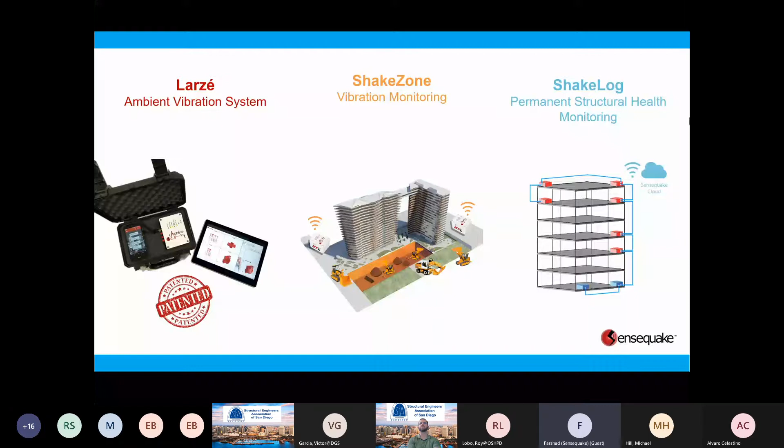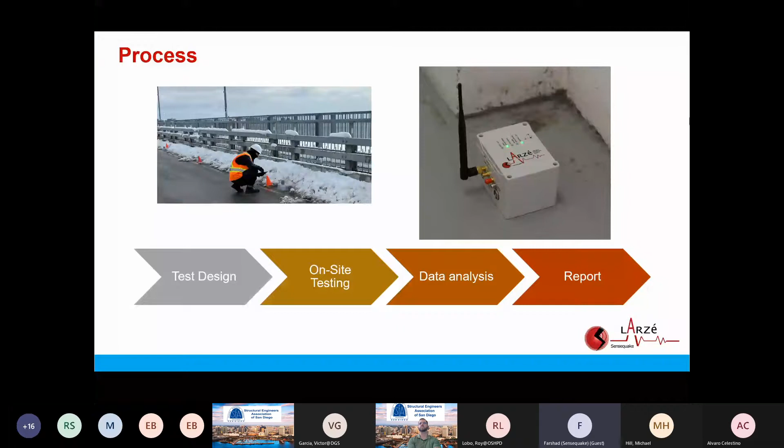We also have ShakeZone, which is a 24/7 web-based dashboard to monitor vibrations at construction zones. The first system, the Larzé system, the temporary sensing test, is very easy to use, measuring hundreds of locations in the operational condition of the structure, followed up with in-depth data analysis and comprehensive reports.

There are many different applications. I'm just showing here three of the applications we have with our temporary sensing system. The first one is getting the baseline of the structure: resonance frequencies, mode shapes, and damping ratios. With the correct type of analysis, you can remove the environmental impact from these parameters to be able to perform periodic monitoring of the structures.

You can detect the damage. You can also localize the damage based on these dynamic characteristics of the structure. For the first time, we have patented algorithms that allow us to use this one-time testing to predict the seismic performance of the structure. It is aligned with FEMA P58 fragility curves.

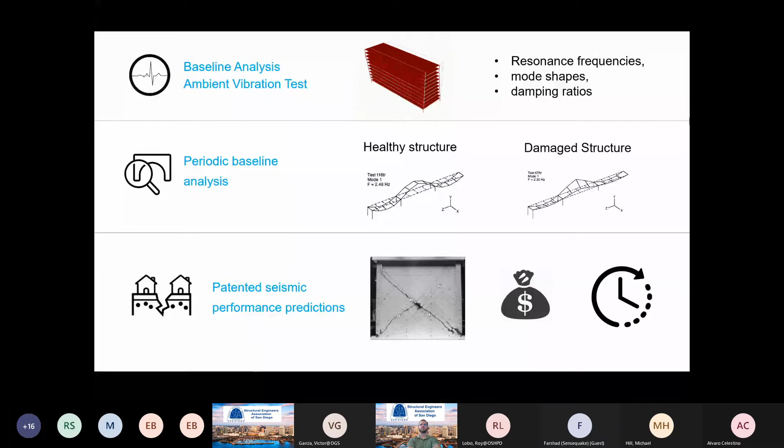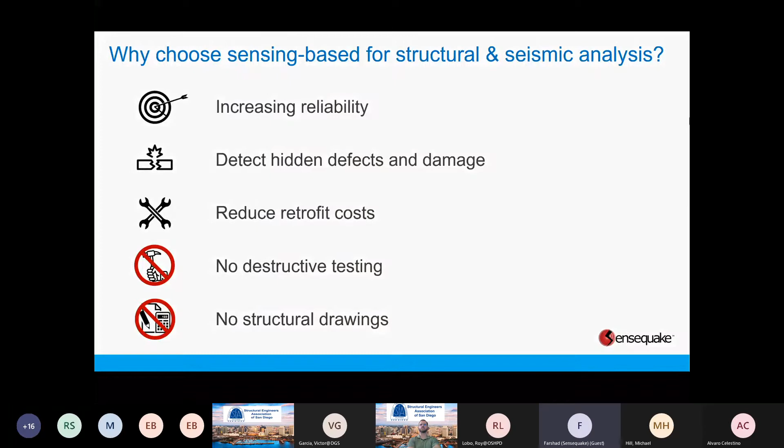Why do people choose Sensequake? We increase reliability, we detect hidden defects and damage points, we reduce retrofit costs, it's non-destructive testing, and we don't need any structural drawings. Our technologies have been used on landmark structures in Canada, US, and Mexico.

Now I want to talk about our ShakeLog. It's a permanent structural health monitoring system, a 24/7 real-time monitoring system. It detects earthquakes, but it also provides in-depth data analysis.

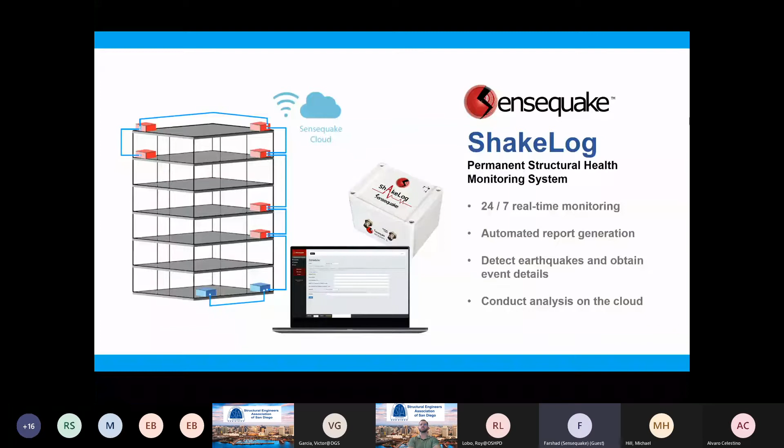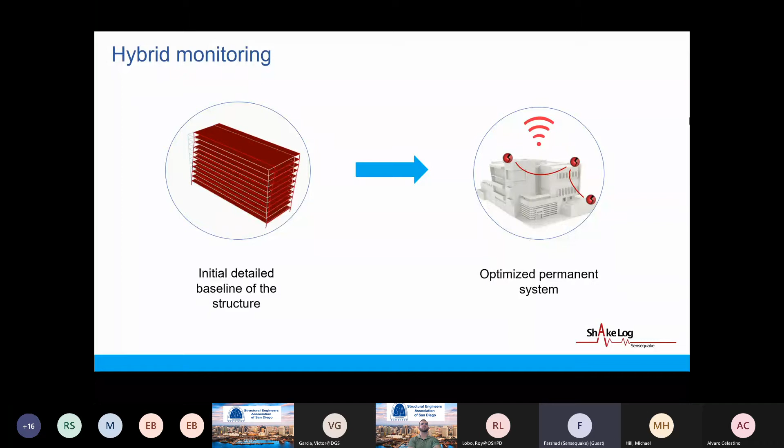We always tell asset owners, if you want a state-of-the-art permanent system, you need a detailed baselining with a temporary sensing system, measuring hundreds of locations that can be used for in-depth data analysis. Then we can identify the best locations to put a few permanent sensors in a structure. The two systems are complementary, and that leads to a state-of-the-art health monitoring system.

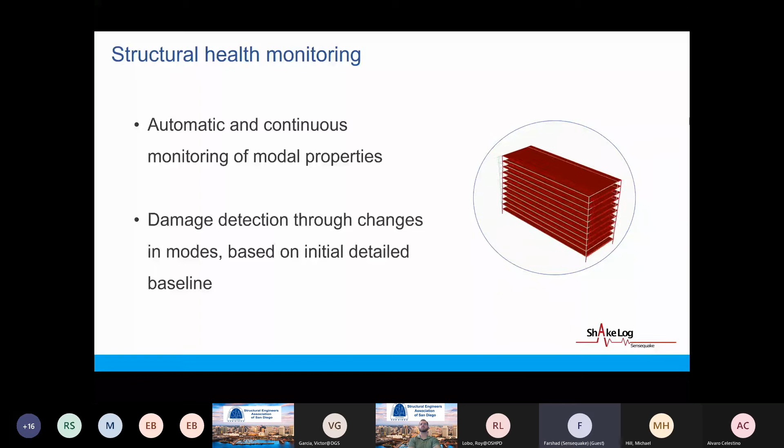Our permanent system is capable of continuous monitoring of the dynamic characteristics of the structure. We can detect damage based on our hybrid system, a combination of periodic monitoring, detailed baselining, and our permanent dashboards. Here are a few images of our web-based dashboards. You can monitor all these frequencies and mode shapes continuously with our dashboard.

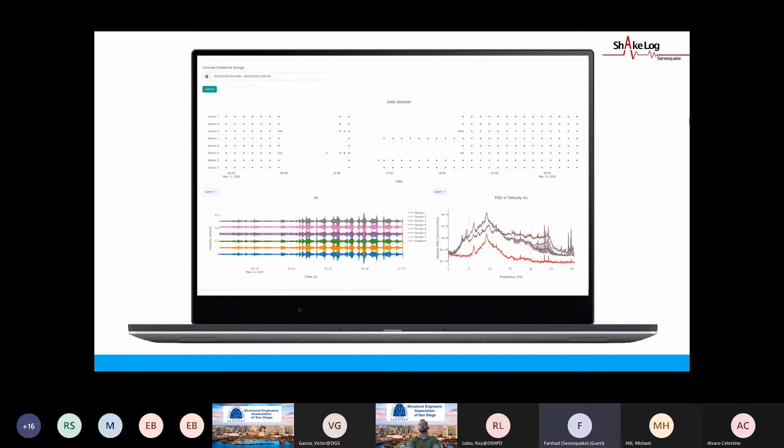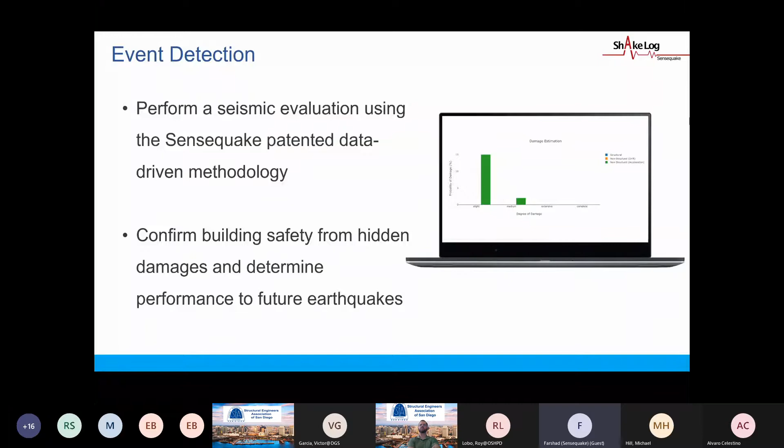And then we capture seismic events. We can send alarms to the owners, to the engineers, and so on. Also, what differentiates the SenseQuake platform is that we can perform in-depth seismic evaluation of structures just based on the sensing tests with our patented algorithms. No need for visual inspections.

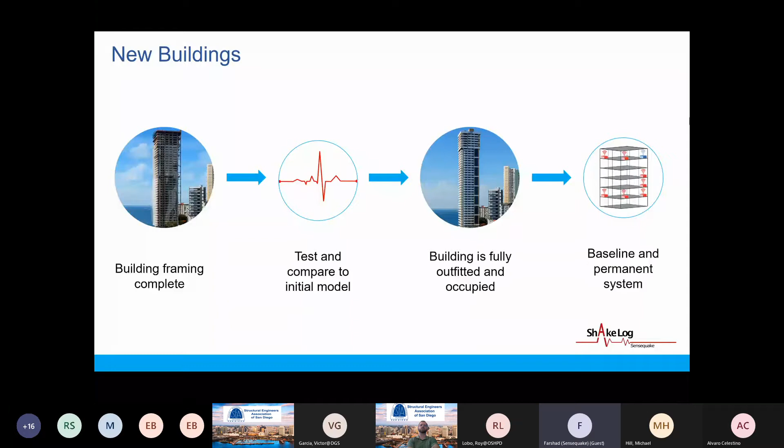If you have a new construction, you can also test the construction during this phase, comparing construction with the design and concepts to see if there is any change or differentiation before the building is fully outfitted. You can then adjust your design and construction.

In summary, we don't use any finite element model. We don't use any drawings. We are capable of capturing the baseline of the structure, which is very important information to detect damage. We can continuously monitor modal properties. For the first time, it's possible to perform seismic evaluation just based on this simple temporary testing or our permanent web-based dashboard.

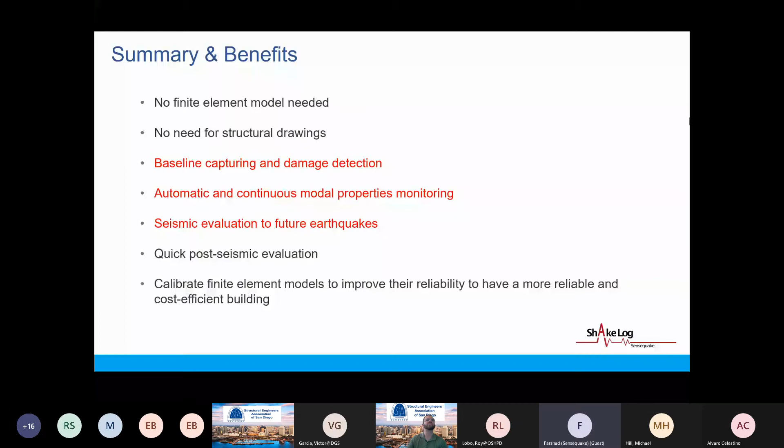Many structural engineering firms in North America are using SenseQuake technologies. We also offer services to asset owners and engineers in North America. We have a very interesting partnership model for local engineering firms that are not familiar with these technologies but are looking to expand their service offerings in their local markets. If you're interested, please let us know. We can discuss the details afterwards. Thank you.

Thank you, Farshad, for the presentation. Your guys' company seems pretty amazing, what you guys are able to do with just some sensing equipment. So I'm very interested in seeing what you guys are capable of doing.

So with that, I'm going to introduce our speakers in our presentation today. Our presentation is about the seismic instrumentation programs that both OSHPD and the City of San Diego are doing in response to recent code changes.

Our first presenter today is Dr. Roy Lobo, principal structural engineer with OSHPD, who has been with OSHPD for over 17 years. Dr. Lobo received his doctoral degree in structural engineering from the University of Buffalo in New York in 1994. Prior to working at OSHPD, he worked with several reputed firms in the LA area. He's an active member of the structural engineering community with memberships in the Structural Engineers Association of Central California and the American Society of Civil Engineers. He was chair of the SEAOSD Seismology and Existing Building Committees, and chair of the same committees for Central California, and he's currently a member of the SEAOSD Board of Directors. He's a voting member of ASCE 7-22 and ASCE 41-23 committees and chair of the ASCE 41-23 Foundation Subcommittee. His expertise is in nonlinear analysis, and he's the prime author of a computer program, IDARC 3D. In addition to his analytical background in computer modeling and software development, he has vast design experience in the evaluation and retrofitting of existing buildings. He's currently in charge of the OSHPD Structural Services Unit, responsible for promulgating all necessary structural amendments to the California Building Standards Code to align with the mandates of the California Seismic Safety Act for hospital facilities.

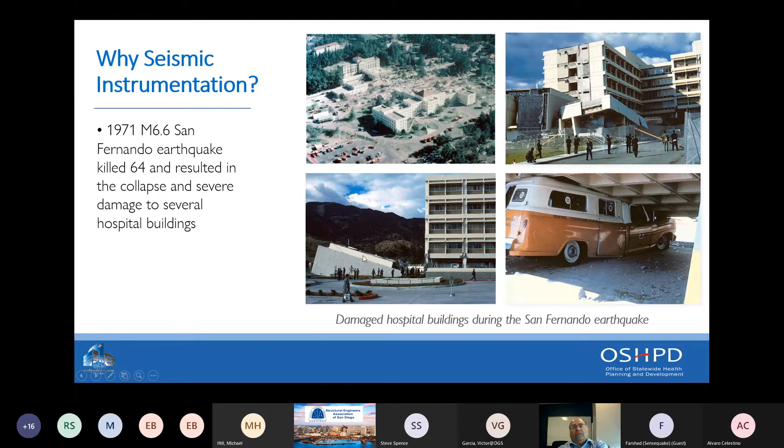Thank you, Steve. So why do we have a seismic instrumentation program? This program was started because of the damage from the San Fernando earthquake. As you can see here, the devastation caused to hospital buildings was significant. Everybody knows the Olive View Hospital, the Veterans Hospital, you can see the stair tower collapsed.

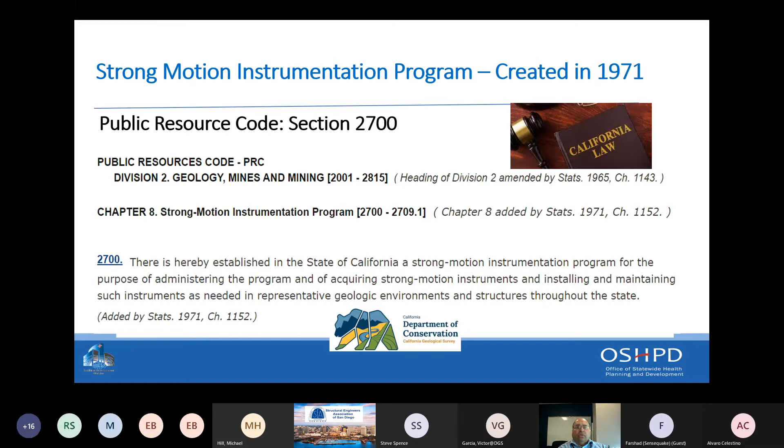This was what sparked the bad performance of hospital buildings and other buildings, sparking the initiation of the California Strong Motion Instrumentation Program, which was enacted into law in 1971. It created the strong motion instrumentation program such that seismic staff would install and maintain equipment in representative geological environments throughout the state for different types of structures. The code section is given there, you can look it up — the San Fernando earthquake was the initiation of the strong motion instrumentation program.

So whatever program you have, somebody has to pay for it. Who is paying for this seismic instrumentation program? It's basically coming out of our permit fees.

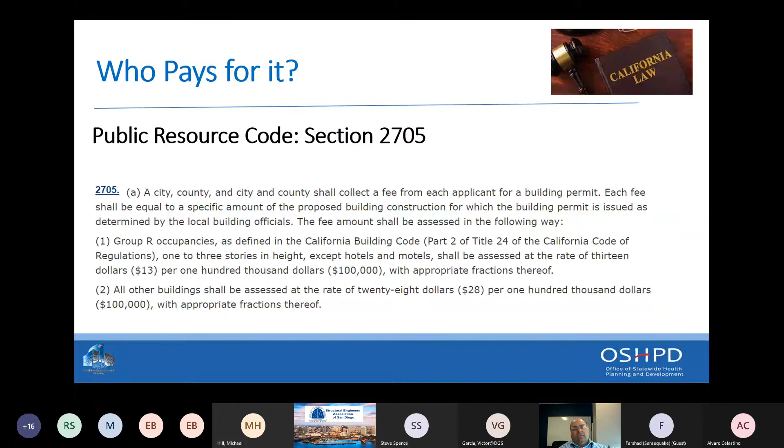Depending on the cost of your building, there's a permit fee per $100,000, a flat fee that goes toward payment of this seismic instrumentation program. For residential buildings it's one price; for other buildings it's a higher price.

However, some buildings are not covered by these permit fees, and there are exemptions. The strong motion instrumentation program will not instrument certain types of buildings unless there are matching funds, with exceptions for hospitals, dams, bridges, and some schools. Since I work for OSHPD, the building department for hospitals, that's what I'm going to talk about today, along with our instrumentation program.

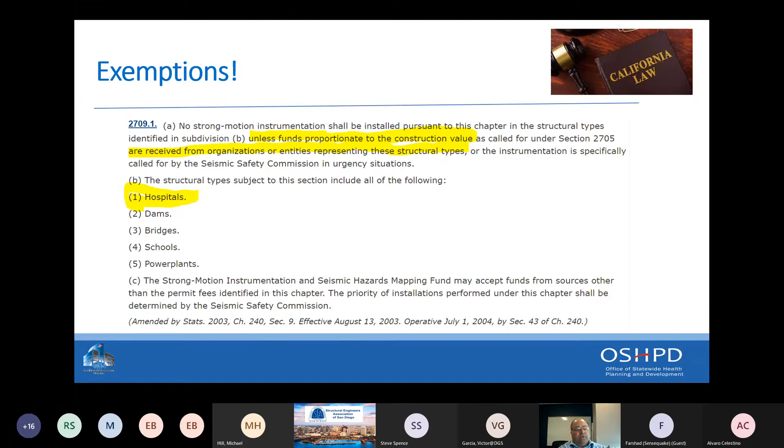The seismic vulnerability of hospitals is well known. I showed you the earlier slide, and this is what led the legislator to respond to the failure of buildings that did not perform well, back in 1971. The 1973 codes changed to add seismic detailing aspects for buildings so they could sustain strong motions like we experienced in the 1971 Sylmar earthquake.

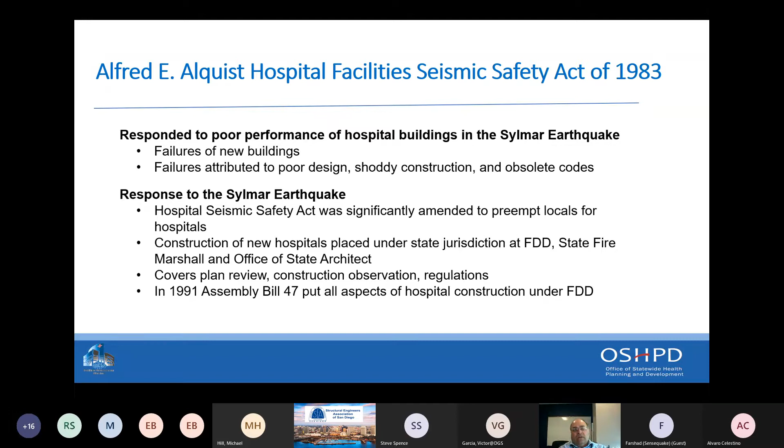That was the response of the legislator, which created the Seismic Safety Act of 1983, making sure new hospital buildings are under the jurisdiction of OSHPD, placed under state jurisdiction at FDD, the Facilities Development Division. In 1991, Assembly Bill 47 put all aspects of hospital building construction under FDD's jurisdiction.

So what is our mission? Our mission is to safeguard public health, safety, and general welfare through regulation of the design and construction of healthcare facilities to ensure they are capable of providing sustained services to the public, since hospitals house patients who have less capacity than healthy individuals to protect themselves, and must be reasonably capable of providing services after a disaster.

That is our mission, and this is our goal, given in statute. This was the first-ever definition of functionality. You may have heard of the new proposed legislation we're trying to push through the legislation committee for SEAOSD on functional recovery.

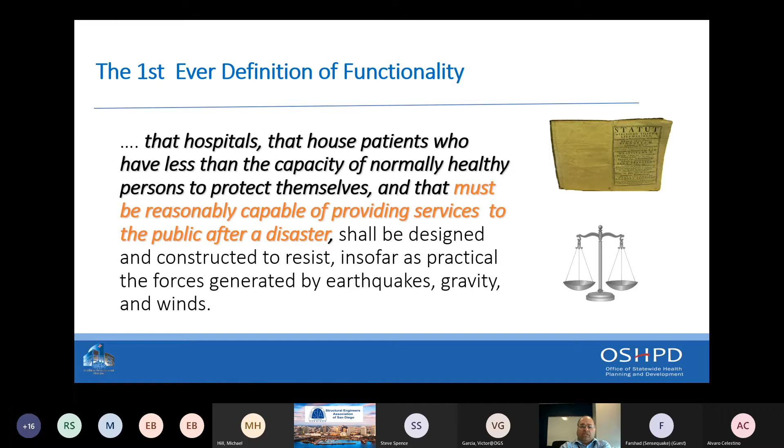OSHPD was already a forerunner on that, and this is our mandate given right back in the 1983 Hospital Seismic Safety Act. The legislator, in the hospital seismic safety code, also gives OSHPD the authority to perform subsequent post-earthquake studies.

Subsequent to the occurrence of any earthquake, the office may make or cause to be made studies of healthcare facilities within the involved area. So if an earthquake happens and affects a hospital building, OSHPD staff is immediately deployed to those hospitals to assess the safety of those buildings for continued operation.

It's similar to your Safety Assessment Program — we do that for hospitals. We red tag, yellow tag, or green tag hospitals after an event. This is the authority that gives us permission to go ahead and do that.

Also given in law is the ability to research ways to reduce seismic risk. It is further the intent of the legislator that the office, with advice of the Hospital Building Safety Board, may conduct or enter into contracts for research regarding the reduction or elimination of seismic or other safety hazards in hospital buildings, or research on hospital building standards. So we also have a legal requirement to conduct research to reduce seismic risk.

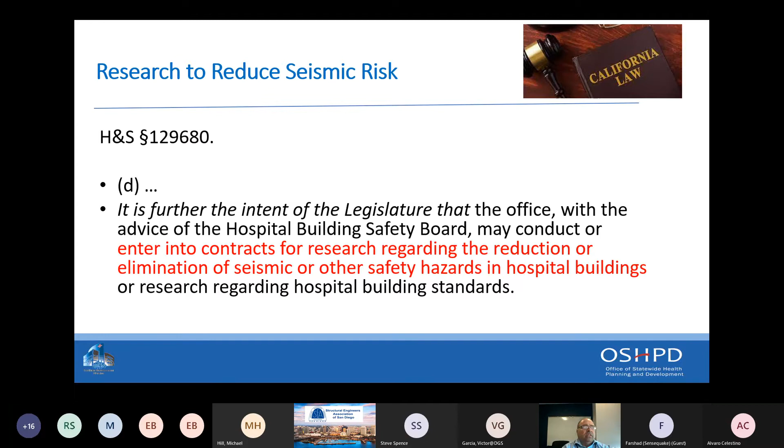Those are the legislative requirements giving us authority to do what we're doing regarding seismic instrumentation. So how well did the Act of 1983 perform? The test came with the 1994 Northridge earthquake — everybody knows that. I happened to be in Southern California at the time, and it was scary. A lot of code changes occurred because of the damages and failures from Northridge.

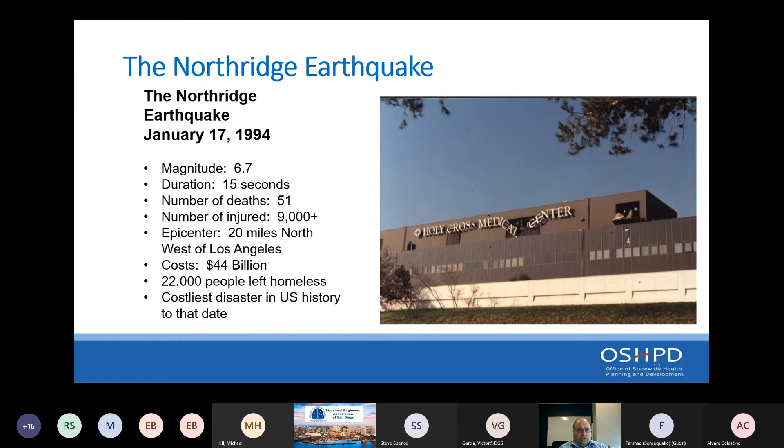So how did hospital buildings perform? We have the 1983 Hospital Seismic Safety Act, and based on that, all new hospital buildings were now under OSHPD. So how did those particular buildings perform? Here's the report card.

At 23 hospital sites, they investigated how the buildings performed in terms of seismic response to the earthquake. There were pre-act buildings, built before 1973, and post-act buildings, built after 1973. This is about the 1994 earthquake.

They looked at how the building performed in terms of the structure, and how the non-structural components performed. There were 12 pre-act buildings that were red tagged, and zero post-act buildings. That looks pretty good.

For yellow tag, there were 17 pre-act buildings, but only 1 post-act building yellow tagged. Yellow tag means only a small portion of the building could not be used after an earthquake. Then 30 post-act buildings were all green tagged. These are for the 23 hospital sites looked at that time.

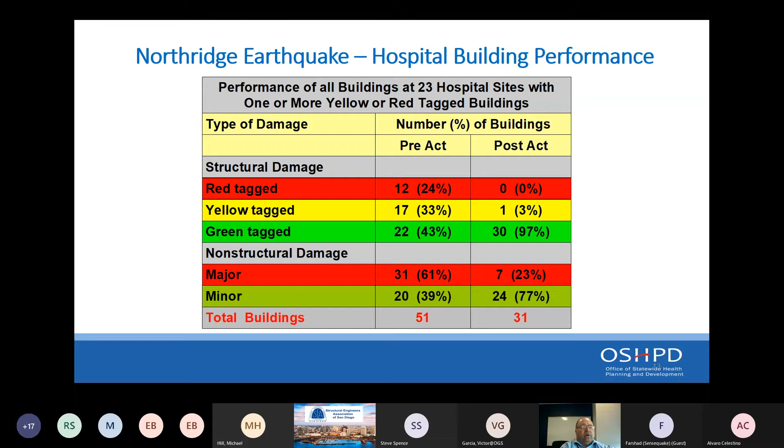But regarding non-structural damage, even the new post-act buildings for the most part did pretty good. Minor damage was high, but major damage was not as high. It showed that whatever they were doing in terms of transferring authority from locals to OSHPD, and looking at hospitals differently so they can continue to provide services to the public after an event, was kind of working.

So how do we evaluate building performance to reduce seismic risk? There are different ways you can do that. You can have shake table testing, using an e-defense building, I think that's in Japan, where you put a building on a shake table.

I was in Buffalo, I studied there for a while. We had buildings put on shake tables, and you shake it, see the results, then you can retrofit it and shake it again. A lot of studies can be done, but that's kind of expensive, right? And you cannot get the size and everything of a real building put on a shake table test, so it has some limitations.

The other way you can check building performance is through analysis and mathematical modeling. And then there's real-world laboratories, which is basically instrumentation of buildings, and then you wait for the earthquake and see how that building performed based on your analysis. Then researchers try to figure out what was the damage and whether they can predict the response.

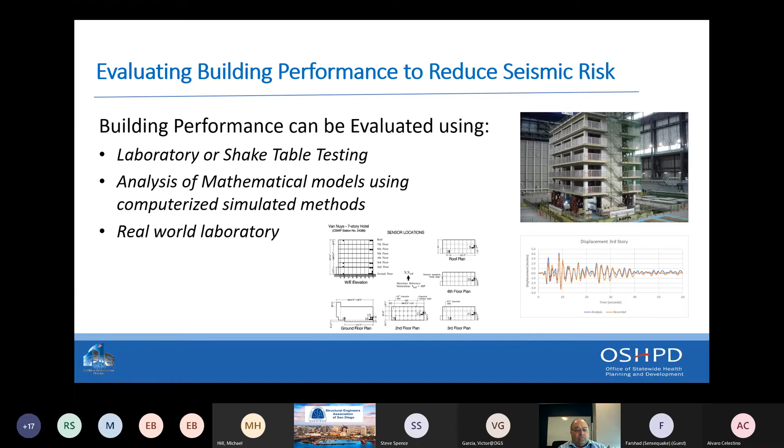So the real world laboratory is where we are today. Recordings from instrumentation are critical to understanding building performance leading to design of safer hospitals. You can do all the lab work or the analysis, but the proof of your efforts is how it actually performs in reality.

In terms of how you locate the sensors, OSHPD works with CSMIP, because as I said, the instrumentation program was created, and CSMIP was created to make sure they maintain these instruments. We also need to provide funding for these particular hospital buildings because they are not part of their mandate. They are still supposed to be in charge of it, but the funding source is different, and I'm going to talk about that a little bit.

So here's where it comes in handy in terms of why we are instrumenting certain types of hospital buildings, because we want to learn more, reduce seismic risk, and understand the performance of the buildings. You can do as much analysis as you want, but until you actually do a full test, you really don't know how it is going to perform, and that's one method to do it.

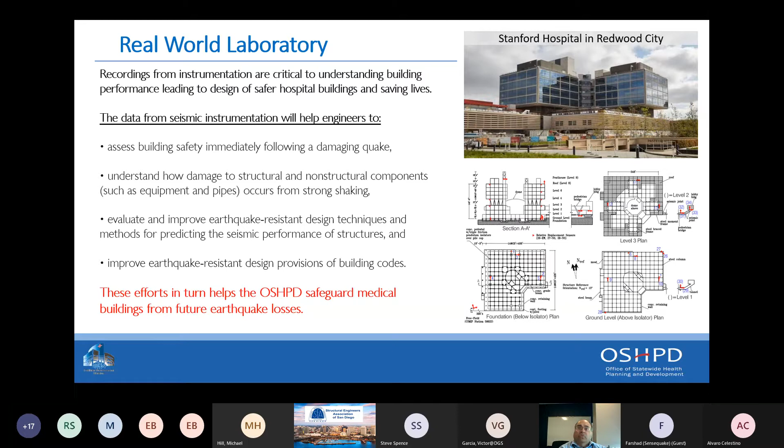The goal is to make sure more hospital and other buildings get instrumented over time. Through these efforts, it will help OSHPD safeguard medical buildings from future earthquake loss. Understanding and reducing seismic risk, because we understand better how these buildings perform, will help us design buildings better for functionality post-earthquake events.

There are two types of buildings instrumented with funding from OSHPD. Even though we may not be paying for it, there are two types under our purview: owner-paid instrumentation and OSHPD-paid instrumentation. Owner-paid instrumentation is when the building code dictates for your type of building that you need to put in seismic instrumentation, and those requirements are given in Appendix L of the California Building Code.

Also, if you have alternate methods of compliance for a seismic force resisting system, or if you have seismic isolation or damping systems, you would also need instrumentation for that building, because these are new technologies and we would like to know more. It's also to help the future - are these buildings going to perform when you have seismic isolation and damping?

Absolutely. The question is, how well do they perform relative to other buildings? And is that going to be a way to have more buildings isolated or with dampers or things like that? But the proof will be how they've actually performed. Those are the requirements for owner-paid instrumentation.

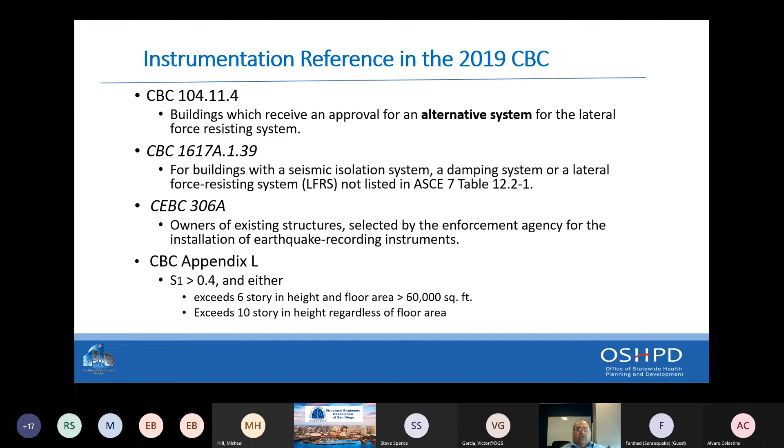So it's section 306A: owners of existing structures selected by the enforcement agency for installation of earthquake recording instruments - those buildings will have to be instrumented. Those are the OSHPD-paid buildings. And then also Appendix L requirements apply to buildings 6 stories in height and floor area greater than 60,000 square feet, or if it exceeds 10 stories in height regardless of floor area - those buildings also have to be instrumented.

So how many instruments do you need? That's always a challenge. Some say you only need 3 levels of instrumentation and triaxial instrumentation at each location, and you're good. But what Appendix L says is that you actually need a sufficient number of instruments to characterize the response. As I mentioned earlier, every time there's an earthquake we look at - can I get drift? Can I get this, can I get that? Oh, we cannot do it. And then we have to use approximate methods to come up with the missing data.

So it's always a challenge trying to get all the data out of those seismic instrumentation. We want to make sure that anytime we recommend new hospital buildings, we are looking at the floor accelerations at the roof, somewhere in the mid-height, and at the bottom, or any levels of irregularity. Then we have instruments there.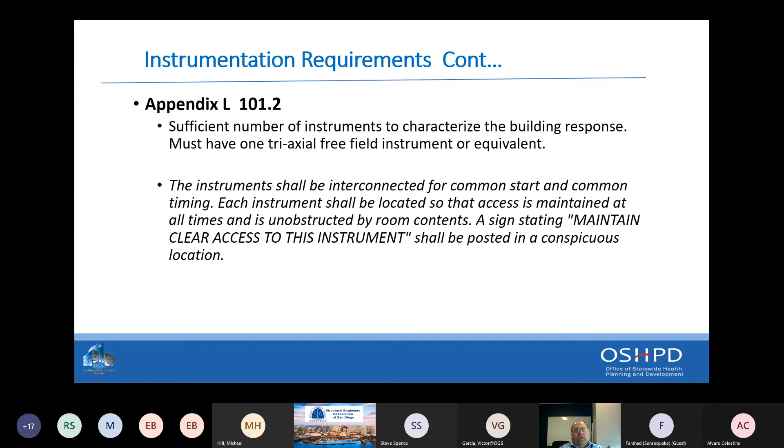Now we are also looking at how we can get interstory drift at floors where we expect high drift. We work with the structural engineer to make sure the right amount of instrumentation is done, because the owner definitely doesn't want to pay for more than the minimum number of instruments. The more instruments you add, the more it costs, and the recorder they have is limited on number of channels. If you have a 24-channel recorder, then you can have 24 sensors. So those are all limiting factors in how we strategically place instruments in the building to sufficiently characterize the building response should we get an earthquake.

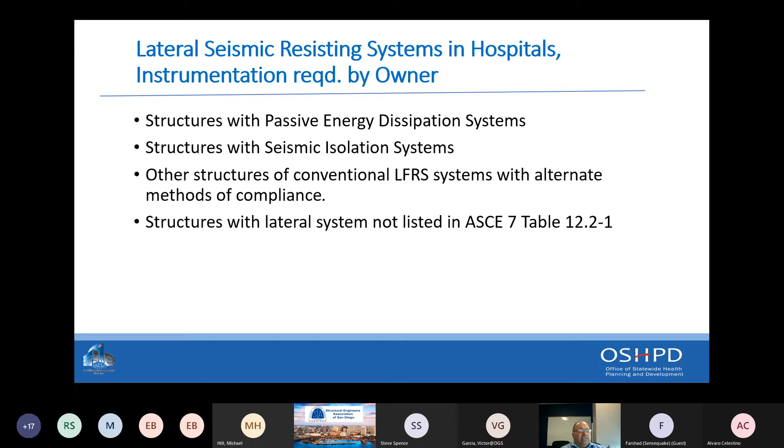Here are the requirements for when the lateral seismic resisting system in hospitals is instrumented by the owner: when you have structures with passive energy dissipation systems, seismic isolation, other conventional lateral force resisting systems with alternate methods of compliance, and structures not listed in ASCE 7 table 12.2-1.

So when there are buildings paid for by OSHPD funding to reduce seismic risk, what criteria do we use? Proximity to a fault capable of generating earthquakes greater than magnitude 6.5, and sites with high probability of seismic events. You don't want to instrument buildings in low seismic areas because the chance of getting an earthquake there is low. We want to maximize putting instruments in locations with a good probability of an earthquake, because it's used for two purposes: to know the individual performance of that building, and also to give a general sense of the seismicity in that area.

Other criteria include non-standard structural systems, buildings adjacent to others with pounding probabilities, and buildings with irregularities like torsional irregularity, soft story, or weak story. We make sure that when we look at these particular buildings, they're probably not going to collapse during an earthquake. We think it's good enough and will probably survive, but it will give us valuable data post-earthquake. The idea of instrumenting is so that post-earthquake, we can learn how those buildings performed, and researchers use that information to do studies to improve building codes and reduce seismic risk.

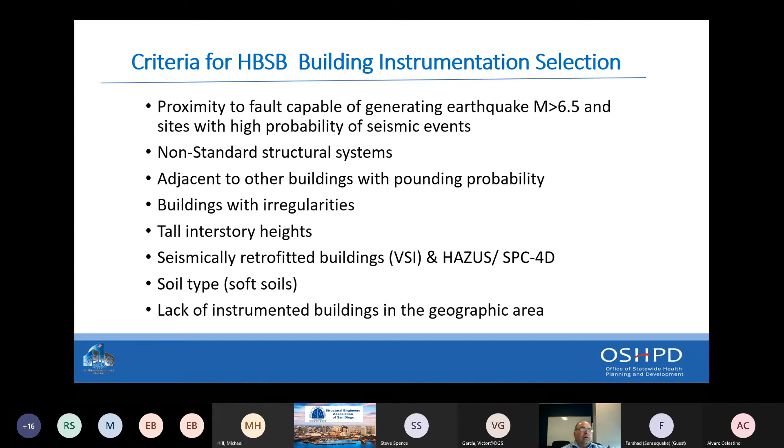So those are some of the criteria that OSHPD uses when they decide to fund hospital buildings.

On this figure on the right, in green, you see the black dots — those are all our instrumented hospital buildings. We have 88 hospital buildings currently instrumented and maintained by OSHPD through the California Strong Motion Instrumentation Program, plotted here on Google Earth. Wherever there's strong motion coming, we've decided that building should be instrumented, either through OSHPD-funded instrumentation or owner-paid instrumentation. We get some of those buildings instrumented based on the geographic regions where they are, so we get spatial distribution adequate to capture the response should it occur at that location.

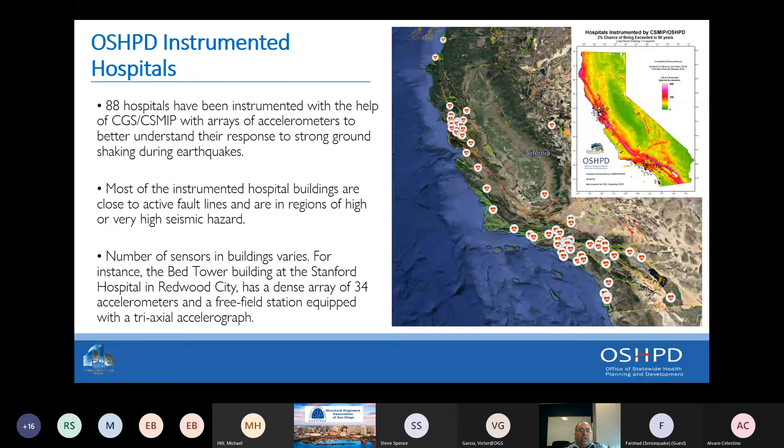The number of sensors also depends on the type of building. If you have a seismically isolated building, you put more sensors. Stanford had 34 accelerometers — that's pretty high. One higher than that is Loma Linda University, which is just being constructed, with about 44 sensors. That building was supposed to have vertical isolation, but the vertical isolation part did not materialize. However, it's a base isolated building with dampers at the base location, to reduce the amount of acceleration at the base. It's a 16-story building and a 10-story building side by side, so it's a very complicated building, and in order to adequately capture the dynamic response of the building, we needed a lot more sensors.

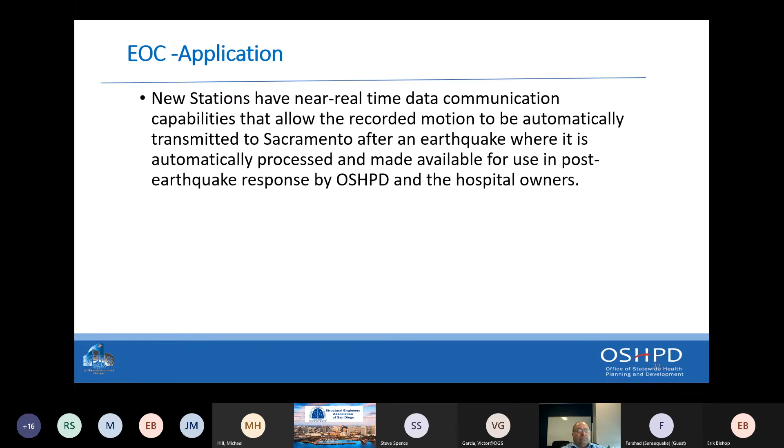Depending on the building, the number of sensors could vary. We also use seismic instrumentation data for a particular site for EOC applications, emergency operation center applications. With the new instruments, we can get near real-time communication from the site location submitted to Sacramento, and then that gets submitted to our emergency operations center. We use that as a means to deploy people to the site to check on their particular building, and also look at the seismicity in the area to get an idea which buildings would need to be looked at in terms of safety for hospitals, to then red tag or green tag those buildings so they can continue to provide service post-earthquake events.

What are some of the applications of seismic instrumentation? To evaluate response of buildings to strong ground shaking, it acts as a surrogate for shake table testing, calibration of computer models, validates dynamic characteristics of the building, estimation of non-structural damage, building resilience, and last but not least, recommended changes to the building codes for improved performance. Every year, CSMIP gives out contracts to researchers to do research to find out, with existing data and existing ground motion studies, what they can learn to improve the building codes so it can reduce seismic risk.

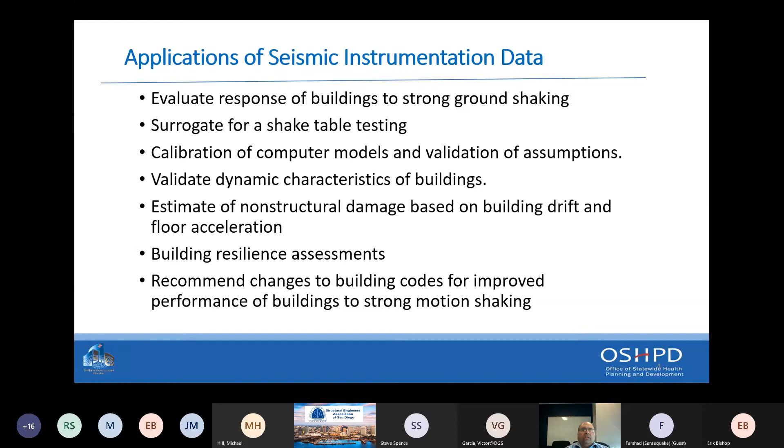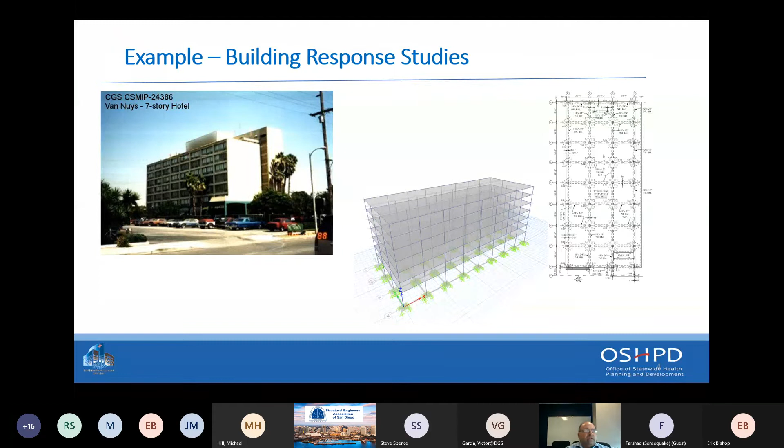Here is one such example. People may have seen this particular building many times - this is the famous Holiday Inn 7-story Van Nuys building. A lot of researchers have done research on this and tried to simulate it. The interesting part about this building, and why it's important, is that it had a lot of damage and the behavior of the building was nonlinear.

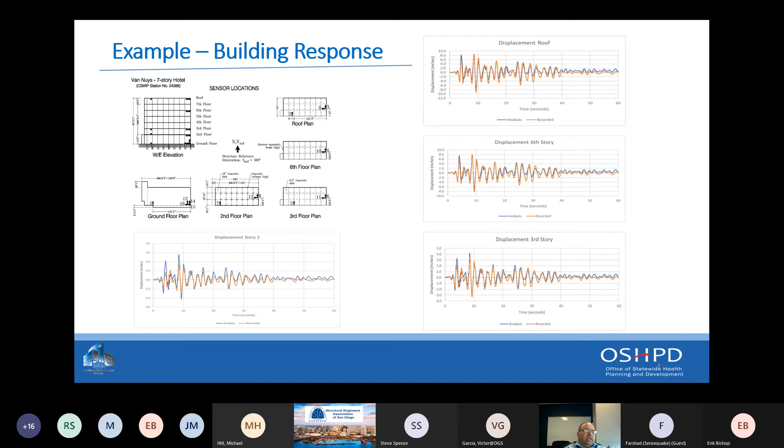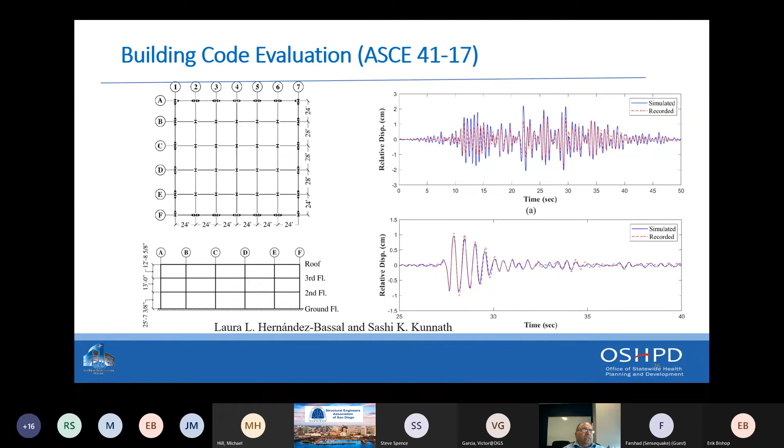This is some of the studies I did to show comparisons of the displacements at the different floor levels with the recorded one. As you can see, this was using the program I developed, IDOC 3D, to see how we can capture that - it is used for that. Other researchers, like Sashi Kunnath, working on a current contract with CSMIP, are looking at a steel building and using this data for recommendations to the building code.

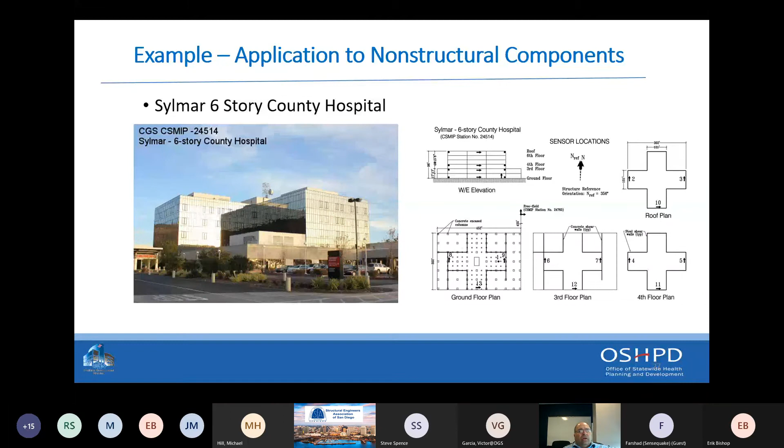So those are for the building itself, and then you also have applications for non-structural components. The Sylmar 6-story county hospital is another hospital that was heavily instrumented prior to the Northridge earthquake, with many floors instrumented also. As you can see here, you have the ground floor, third floor, fourth floor, so you can get interstory drift, and also the roof plan. This particular building also showed the amount of floor accelerations that you can get.

Once you get the acceleration at each floor, you can do a response spectrum - you can get the floor spectrum. From there you can say, okay, if this is my response at a particular floor, what is my expected performance of my non-structural components in terms of accelerations? Because the stiffer you make your building, the more forces you can get. As you can see, the spectral acceleration for different channels at different floor levels can get pretty high values, like 6G and things like that - it's pretty high.

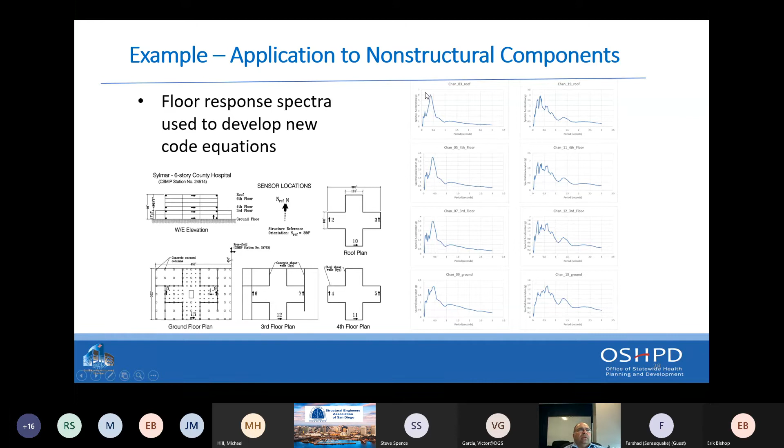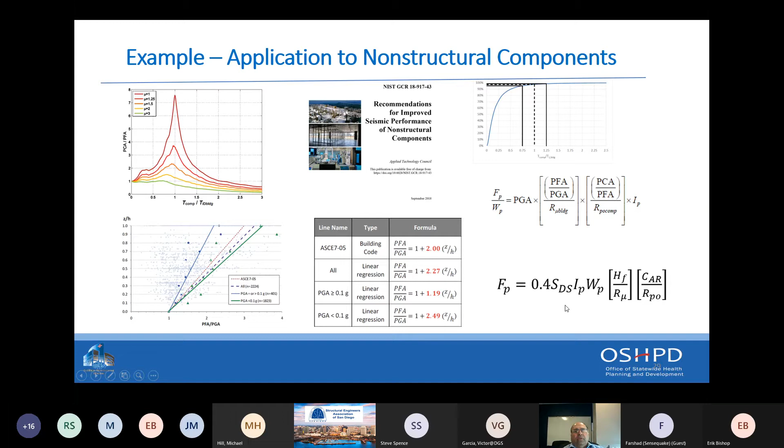These data have been used by researchers, also partially funded through the CSMIP instrumentation program, to look at your F sub P equation in chapter 13 of ASCE 7, and say, how can we use this data from strong ground motion instrumentation to improve model building codes? So they came up with a new equation, which is probably going to be coming in the next version of ASCE 7-22. There's a lot of applications for that.

In addition to instrumenting buildings for general science, there's also instrumentation to know the health of your particular building itself. If you want to look at one particular building, structural health monitoring is important, because post-earthquake there are what's called aftershocks. So how well your building is going to perform depends on what is the damage.

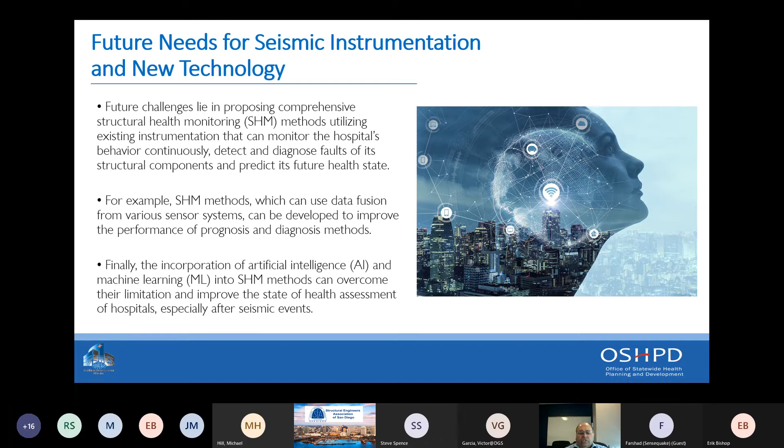And the information that you can gain from those seismic instruments can be used for future research and development to reduce your seismic risk.

So what are some of the reasons for monitoring? That's one reason, instrumentation, and the other one is structural health monitoring. So if you have an instrumented building, why do we need to monitor that also? Here are some of the reasons.

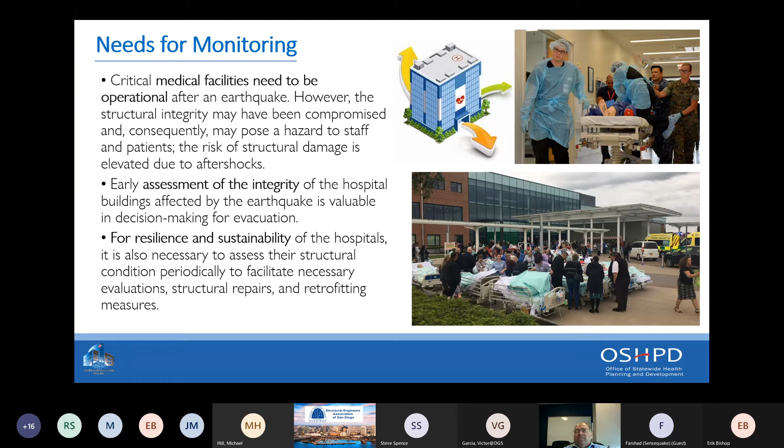Medical facilities need to be operational after an earthquake. It's for early assessment of the integrity of the hospital, for aftershocks, and resiliency and sustainability. If you know your building characteristics and what happened, you can know the output, and also use that data to say, if I design a building this way, another similar building is my expected performance. You will not know the real performance, you will know the expected performance.

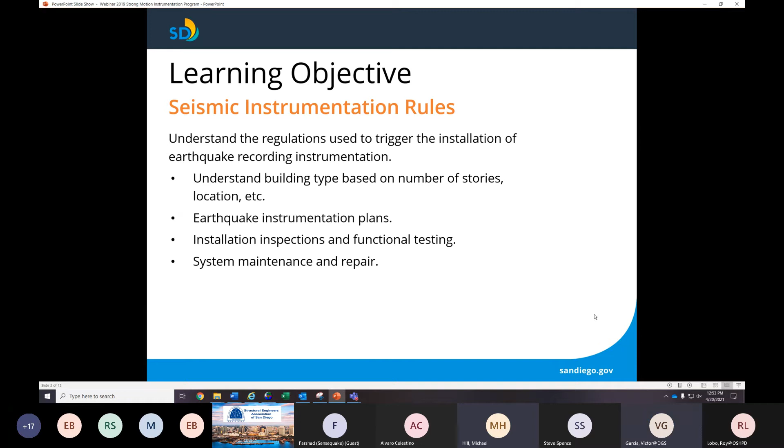The authorizing documents for this requirement come in two different places. One is Appendix L in the CBC, which we adopted since the 2016 Building Code without any changes, except we don't include the OSHPD amendments. The other one is for tall buildings. These are alternate means of compliance to the building code, as Roy was talking about.

Most of that comes through our structures that are higher than the structural height allowed by the building code, and we follow the LA Tall Building Design Guides or the TBI design guides - Chapter 5 in the LA Tall Building, Appendix A in the PEER Tall Building Initiative. We follow what they require for these alternate methods. I don't think we have any structurally isolated systems here, but that may be required when we go down that route.

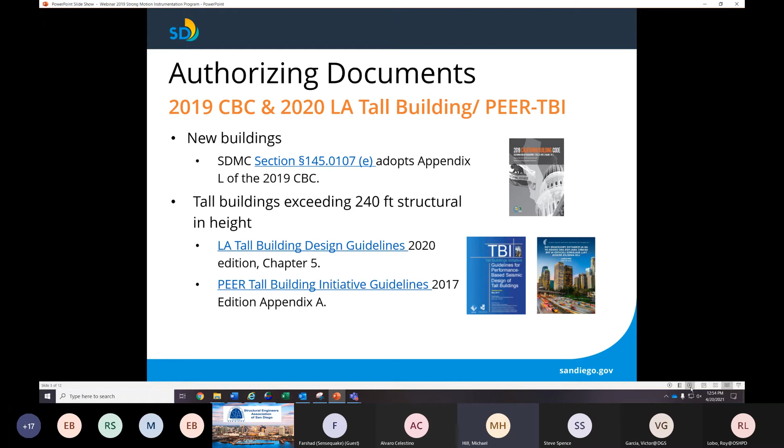Talking about the reasons we like to see these instruments: for one, we collect money to put these into buildings, and these are funded through our permit process. These help inform the local designers about the ground motions here, and should help considerably in the design of tall buildings. There's not a lot of information being collected.

I know the Rose Canyon fault is, I believe, the most prominent fault in the area, and they should be able to get some better readings and do a better design of the structures, especially for the performance-based design structures that we have going on here. We have quite a few going on right now - about half a dozen in the works.

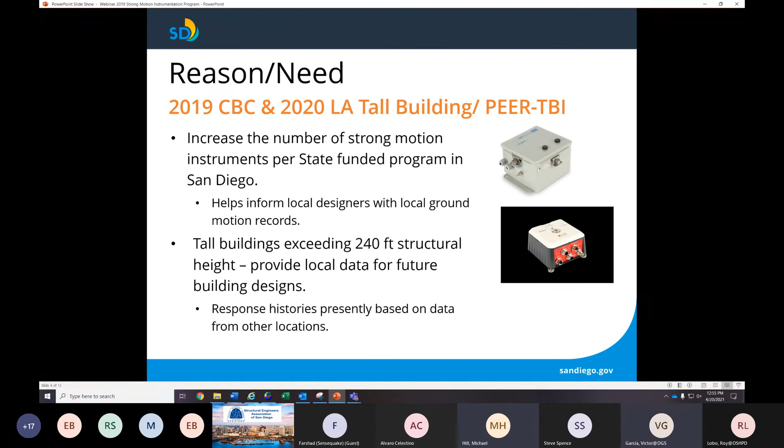Starting with Appendix L, that requires that buildings, when the S1 acceleration is greater than 0.4, and the structure either exceeds 6 stories in height with an aggregate floor area of 60,000 square feet, or the structure is over 10 stories high, then Appendix L requires this instrumentation.

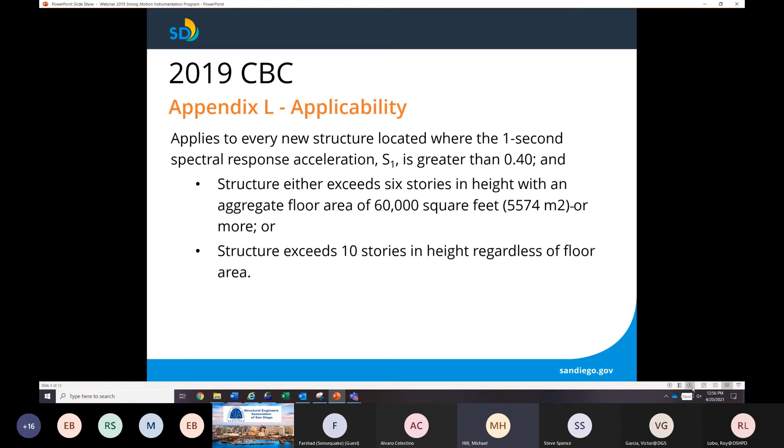Now, in San Diego, what that means, if you're familiar with San Diego - 0.4 acceleration is basically west of the 805 all the way up to Del Mar, and east of the 805 is less than that, so those areas are not going to need this instrumentation. This includes everything downtown, in La Jolla and Clairemont, and all the way up the coast to Del Mar. Anything over 10 stories in height is also going to require that within that 0.4 area.

In the 2019 CBC Appendix L - I skipped a page here - Appendix L structures need to be equipped with 3 or more approved accelerographs, and the accelerographs need to be interconnected for a common start and common timing. Generally, what I've seen is 3 being used in most of the installations that aren't performance-based design.

Usually communication wiring is installed to connect the top and bottom device to the mid system and storage transmitting system. There are no requirements for remote communication, so there's no remote monitoring - the data is all collected from the building. These are not monitored by CSMIP.

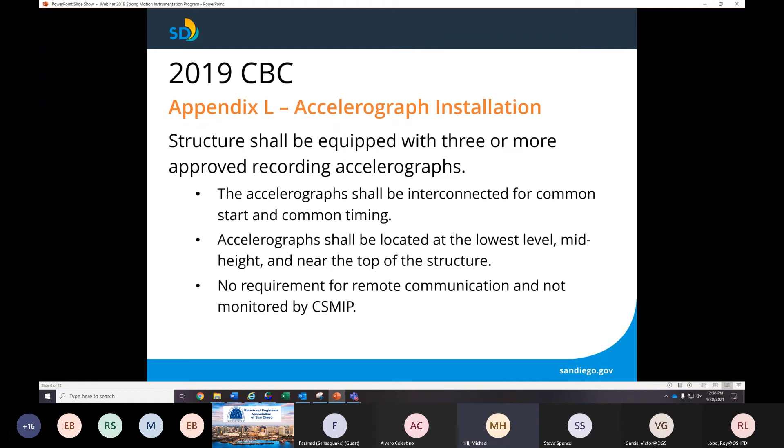The CSMIP people are definitely involved with the tall buildings that we have here. These systems are much more elaborate and can include up to 30 or more instruments. The instruments are distributed over the building's height and measure in all three directions, and they're connected directly to CSMIP.

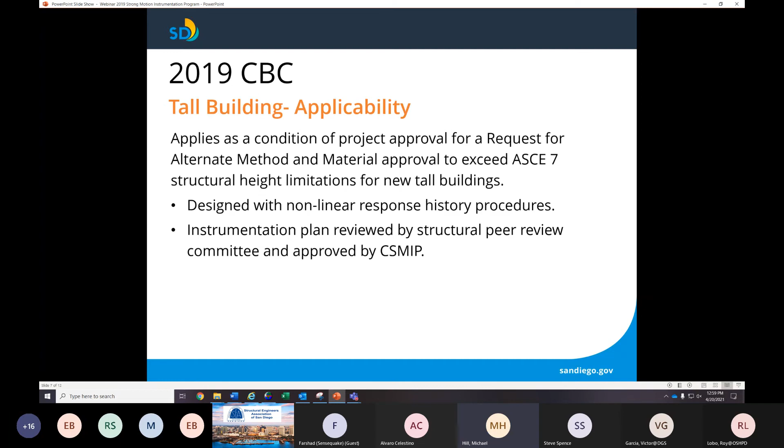For the tall buildings that we have, like I said, there are 30 or more instruments required by LA Tall Building. They're installed all along the building height and the basement. Remote communications go directly to CSMIP - the instruments are not monitored locally, but the remote communication goes to CSMIP to be recorded. These are for systems designed either by TBI or LA Tall Building, and again, these are the performance-based design buildings that we've been doing around here.

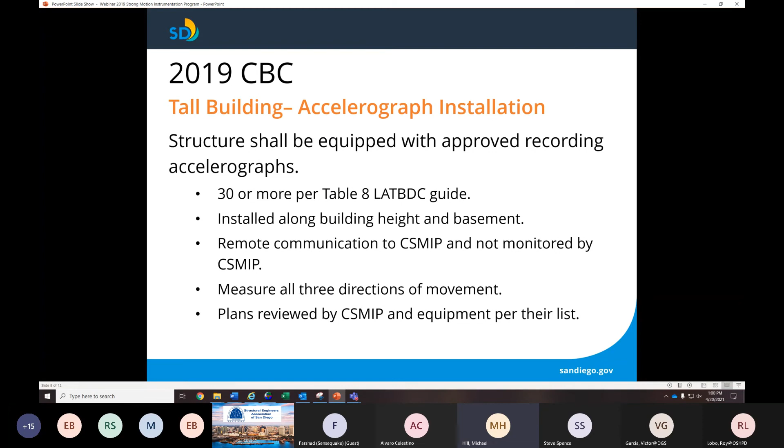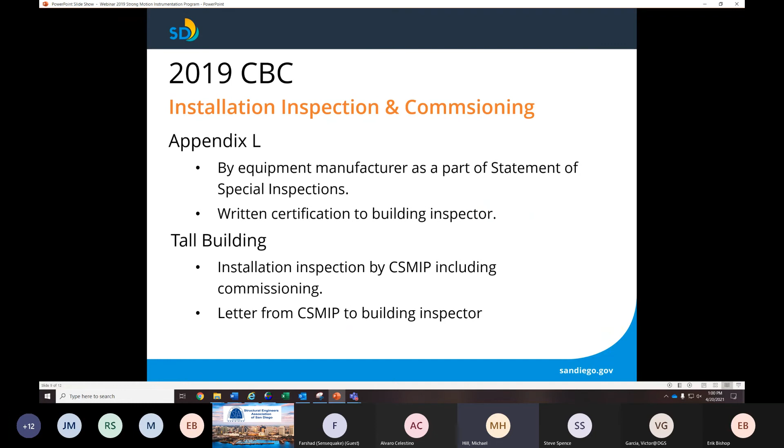For Appendix L, installation and commissioning procedures: the equipment is installed by the equipment manufacturers and is inspected by the manufacturers as part of the statement of special inspections. They get written certification to the building inspector that these satisfy all of their requirements. For the tall buildings, those installations are inspected by CSMIP, and they do the commissioning of the equipment as well. CSMIP issues a letter to the building inspector saying that these meet their requirements and they're good to go.

For maintenance and repair, Appendix L for the non-performance-based buildings, the maintenance is done by the property owner. The manufacturer monitors the equipment and performs regular inspections. For the tall buildings, these are also maintained by the property owner, but CSMIP notifies the owner of the trouble to maintain and replace the equipment, so they keep an eye on it.

As far as the equipment that is qualified for the CSMIP program, they will generally take anything that meets the requirements for the California Geological Survey systems. They will take the same equipment. And actually, that's the only equipment they'll take.

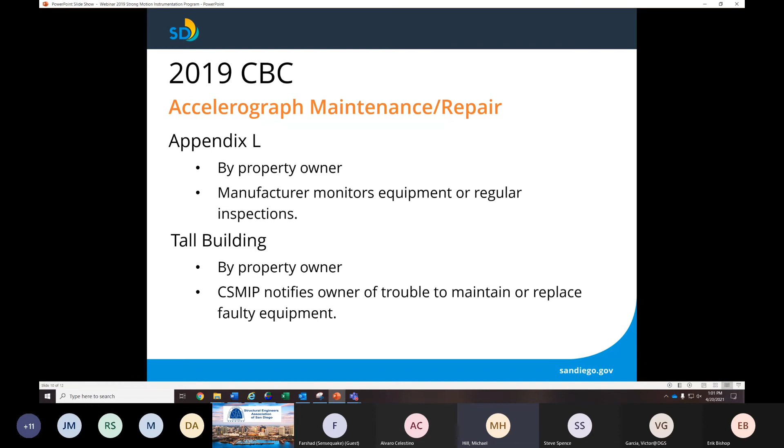We do have a technical bulletin on our website that tells the contractors and owners what the requirements are for the instrumentation. It's Technical Bulletin 16-1, and it addresses how long the equipment can be out of service and what needs to happen to get it back into service. This was developed based on the LADBS information bulletin on the subject. We'd like to keep these going as long as possible and as maintenance free as possible.

And like I said, this is going to be much shorter than Roy's. So if we have any questions, we can take them now.

Thank you very much, Michael. I'm not seeing any questions in the chat window yet. So while people are hopefully preparing a few questions, I've got one for you.

How many of the non-performance-based design buildings that are under construction right now in San Diego have actually been built and have been instrumented?

This hasn't happened much. As far as I know, there are only a handful that this has affected, and that would be the most. A lot of the buildings downtown, any of the new buildings, none I can think of off the top of my head, but I have heard of only three or four, less than a handful, that have had this requirement and have needed to satisfy this requirement.